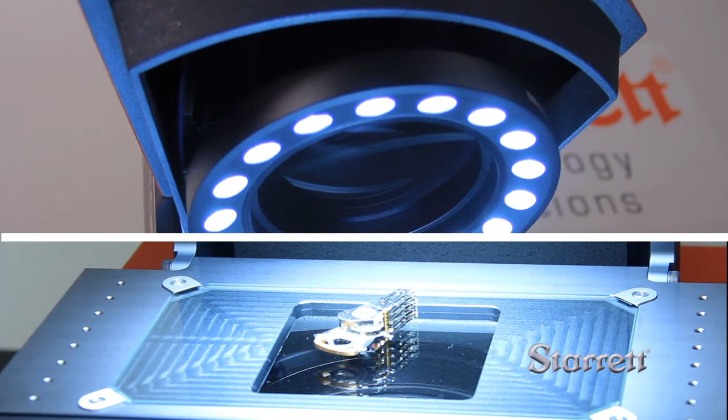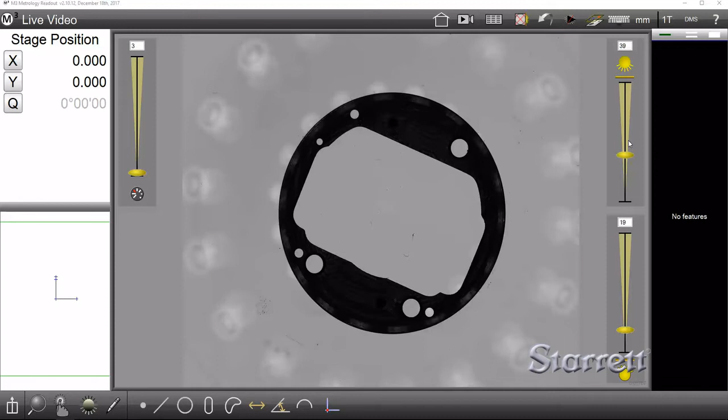Let's start by putting a part on the machine, adjusting the lights appropriately, and taking some simple measurements without a previous program. First, place your part in the center of the field of view, then adjust your light levels and focus to get the best measurements possible. You can use surface lighting to get features that won't be seen through transmitted lighting, but for simplicity's sake, we're going to just use transmitted lighting for this demonstration.

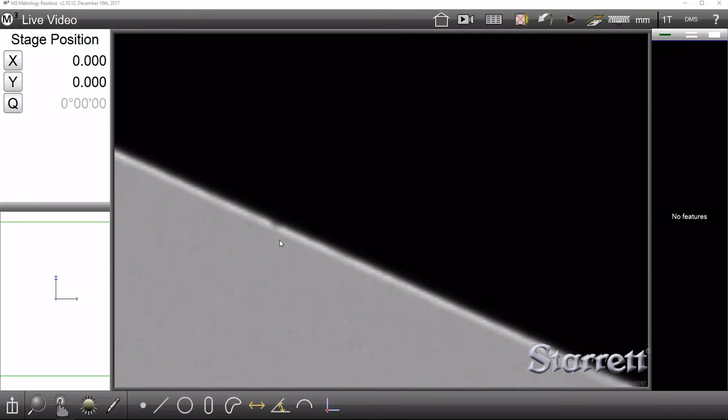One of the very important things is making sure you're in very good focus. You do this by zooming in on the part, looking at an edge, and moving your zoom in and out until you start to see the stair-step pattern here. As you can see, we started in pretty good focus. Now you can see it going out of focus. As you come back in, you'll start to see a pixel stair-step pattern appear, and that means you have optimal focus.

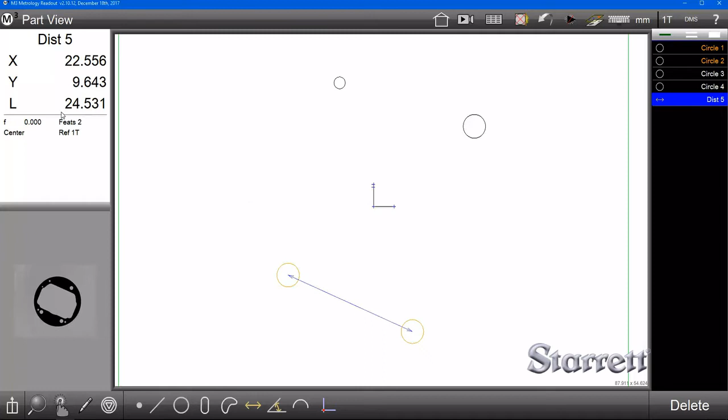At this point, feel free to start clicking on features to populate the feature list, and then you can measure those features in relation to one another. For instance, we could take the distance between these two circles here. It'll show you the distance to the centers, it'll also show you the closest distance, like that, and then also the furthest distance. You can do this with most features.

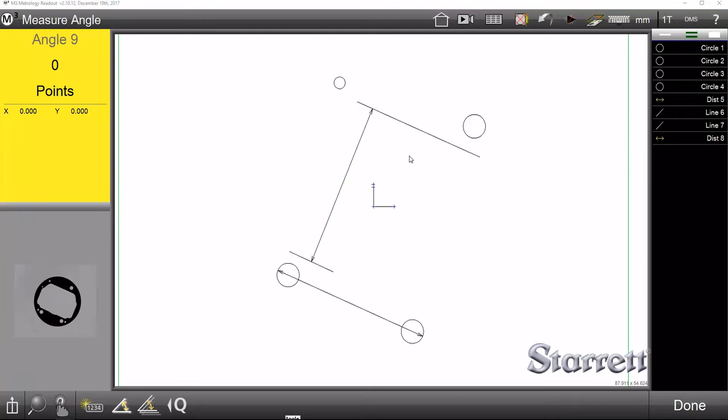For a line, just simply click on a line. You can then do things like measure the distance between those lines, or measure the angle between those lines, like so.

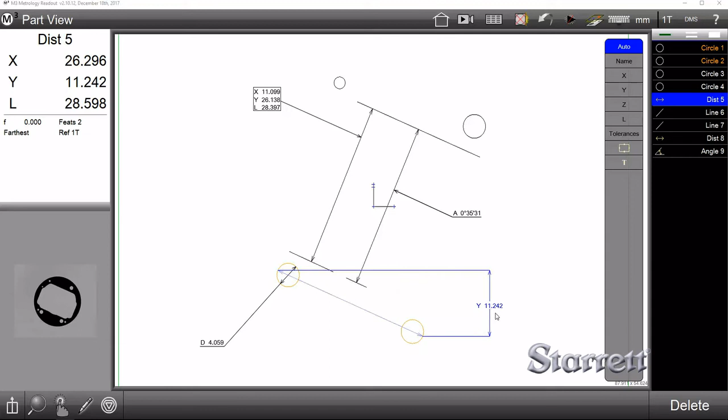We can then use markup to see more graphically these values. For instance, there's our angular measurement, here's diameter, here's a distance here. You can see it's toggling between X, length, and Y. You can also discretely change these up here on the upper right.

Next, I'd like to show you how to set up a simple parts program. Essentially, we'll be doing the same types of simple measurements we were just showing, although this will be part of a formal program that you can pull up and use at a later date.

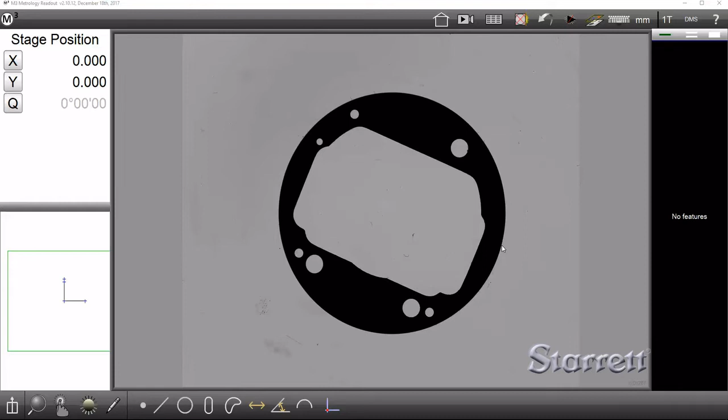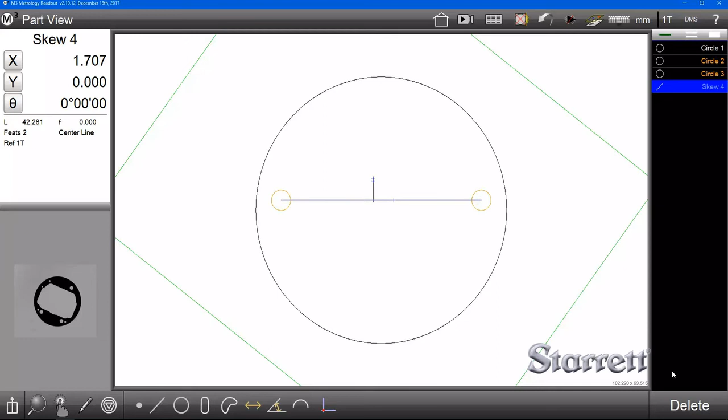The first thing we'll want to do is measure some datuming features. For instance, I'm going to measure the largest outside diameter and these two smaller circles here. What I'll then do is go into this graphical interface, and set our skew as these two smaller circles. What this does is it makes the line between them our horizontal axis.

We'll then set the zero point as the center of the very large circle here. This is all somewhat arbitrary, it doesn't have to be this way, it's just what I'm deciding to do right now. Now that we have that set up, we can start to measure other features on the part, like so, and this is all being recorded as part of the program.

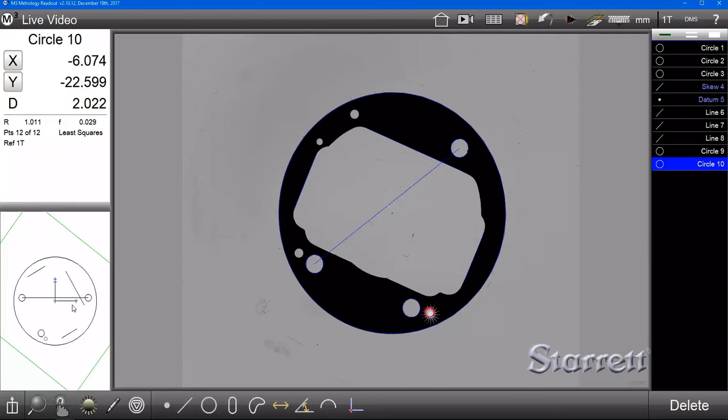You can see these features populating, and then we can start to do some measurements. So you can measure the distances between these circles here, you can measure the angles between these lines here, and we can mark them up for ease of reading, like so.

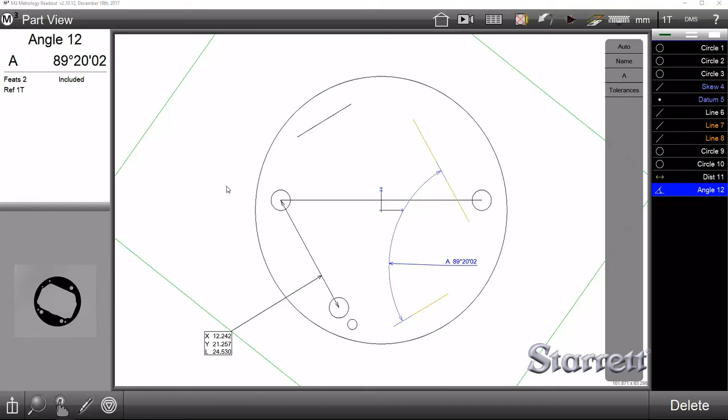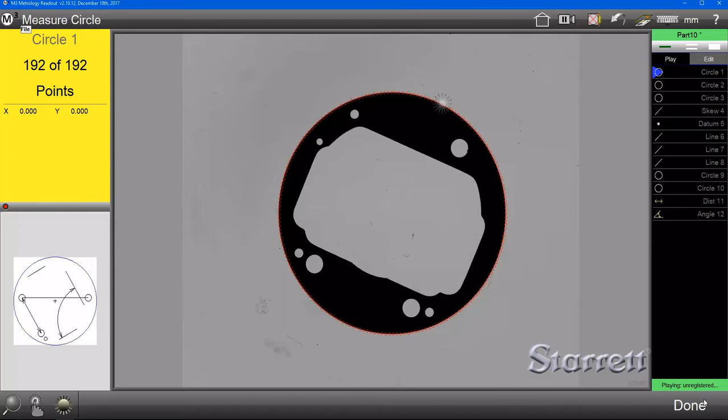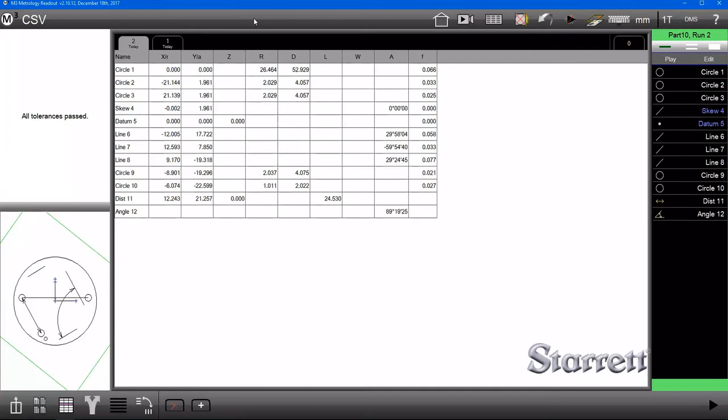Now, if we go up to the top left and hit play, it's going to prompt us for those same features we used in the first place. So we're going to remeasure that outside diameter here, then we're going to measure this circle. Then the rest of the program is going to play automatically and show us our results in this view. You can also see it in the graphical interface and on the video view.

Next, we'd like to show you how to take that same part program and set it up for auto part recognition. Instead of manually pulling up the program, you just place the part on the machine and it will recognize it and measure it automatically.

This is one of the best features of this machine, and it allows you to measure parts with very little interaction. So first off, we're going to start with a pattern.

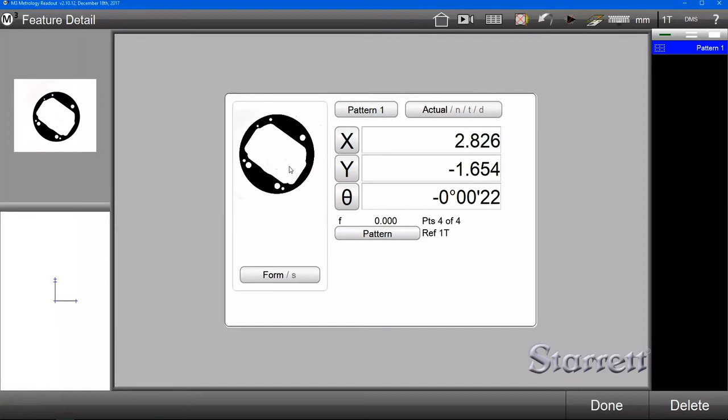Simply drag a marquee over the entire part, and you'll see it populate with yellow spots everywhere. Now you can see we've got a couple of stragglers here because of some specks on the stage glass, and that's very common, so you can come in here and remove those. We'll hit done.

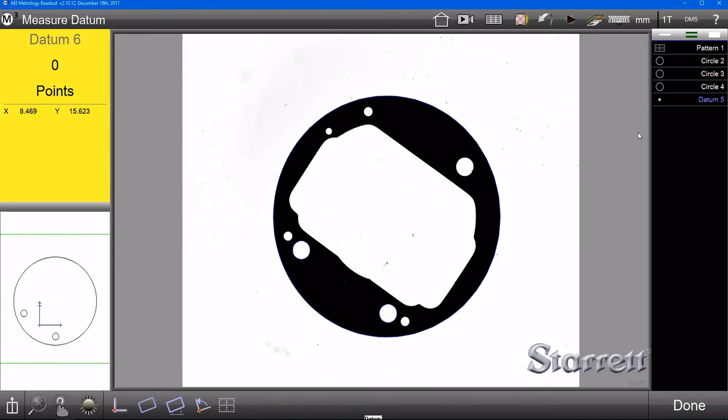Next, we're just going to set up our datuming features like we did previously. So we'll measure these two smaller circles here, then the large circle here. We'll set the skew as those two smaller circles, and we'll set our zero point as the large circle. Now we can measure the rest of our features, like so.

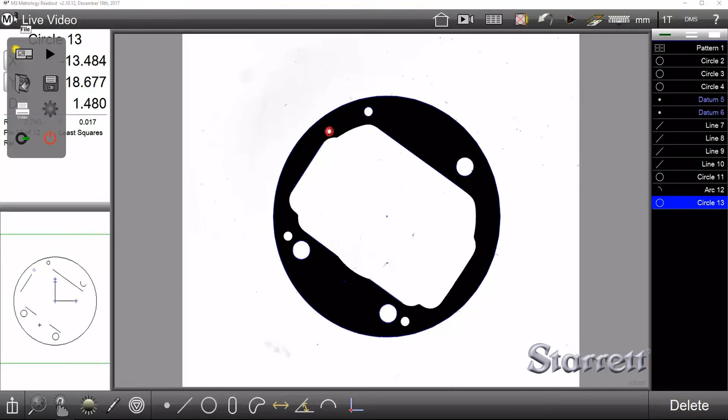Now when we hit play, it's going to use that pattern to automatically orient itself. We're going to say yes to saving changes, and then we're going to add that to our auto part recognition list in the settings. So you go to Programs, Program Finder, Add to List, part number 12.

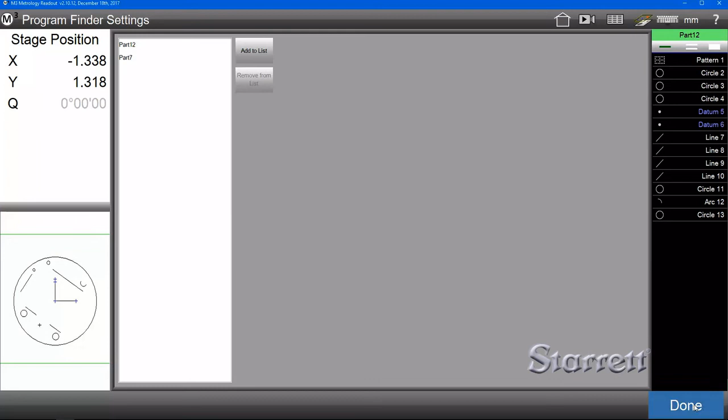Now, in order to activate the auto part recognition mode, on the top right you'll see a little play arrow. Click that and remove everything from the field of view. Now click New Part on the top left. You'll see the play arrow go green, and when you place a part in the field of view, it's going to automatically search a database for a matching pattern.

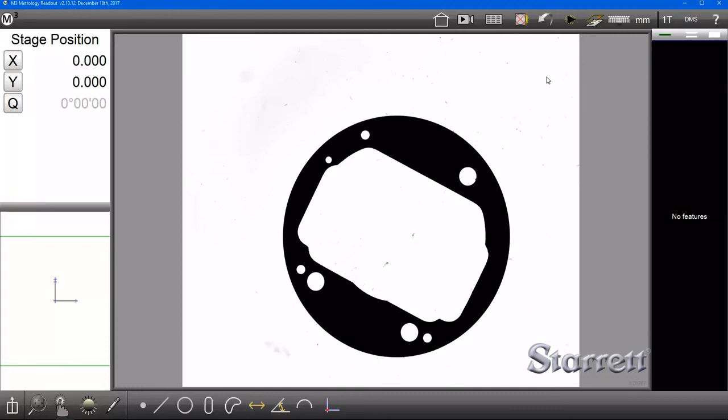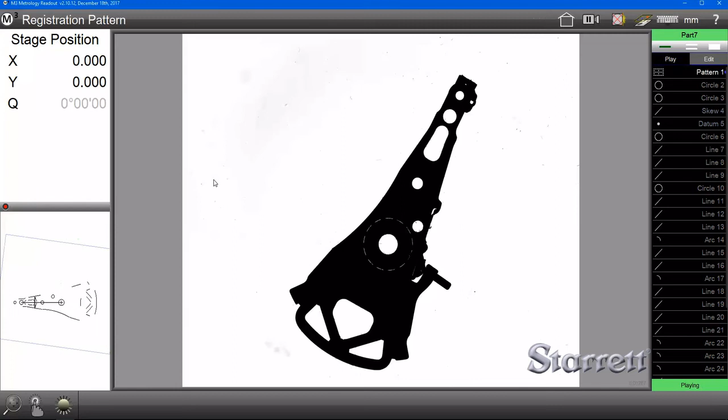It will run through the program automatically, and what's nice about this is when you take this part off and put a completely different part on that's also in the library, it will measure it just as quickly. And there you have it.

The M3 software allows you to use a variety of tolerance reports and a few different file types. Let me show you how to do that now.

Once your measurements have been made, there's a variety of different ways you can look at the data. Under the list here, you can see various different tolerance reports in different types, and these can all be exported to the location of your choice as a TXT, CSV, TSV, or even a DXF, which is a graphical drawing that can be seen in CAD.

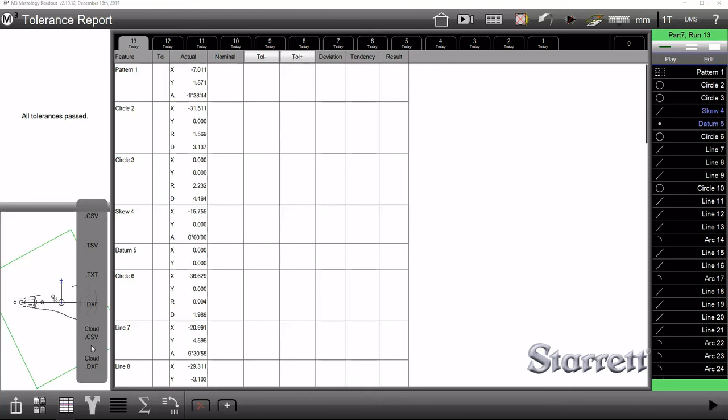There's also cloud export options here, and all of these are part of the automatic measurement routines in the software.

One of the best modules for this machine is the thread module. What this allows you to do is measure a variety of different types of threads very accurately and very quickly. Let me show you how to do that now.

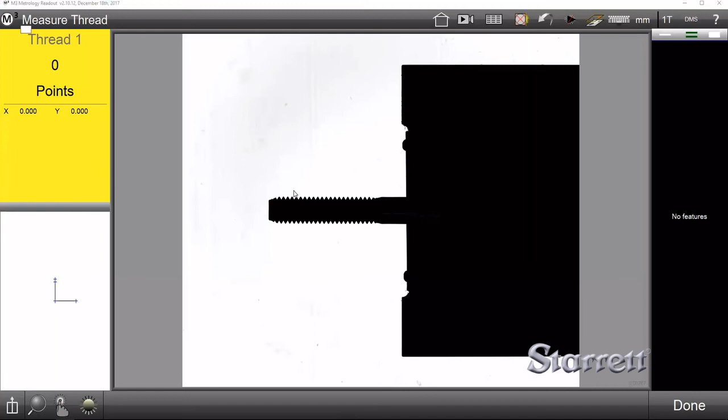Simply select the thread module, drag the marquee over the threads, hit enter, and then done. Now when you select that feature from the feature tree, you'll be able to look at the data, including outside diameter, root diameter, pitch diameter, and pitch.

You can then go set up tolerances based on normal hardware standards, or you can set custom tolerances yourself.

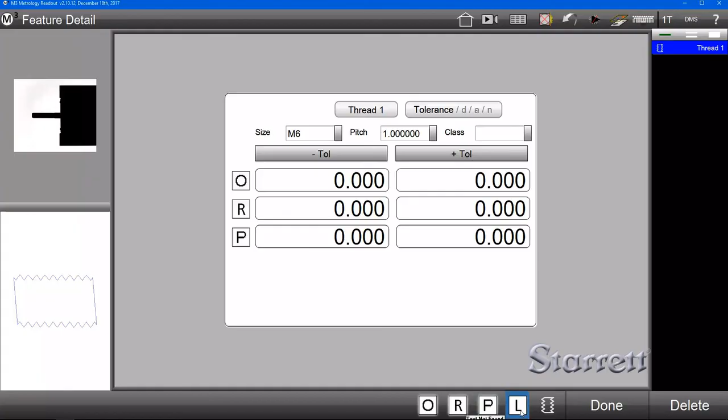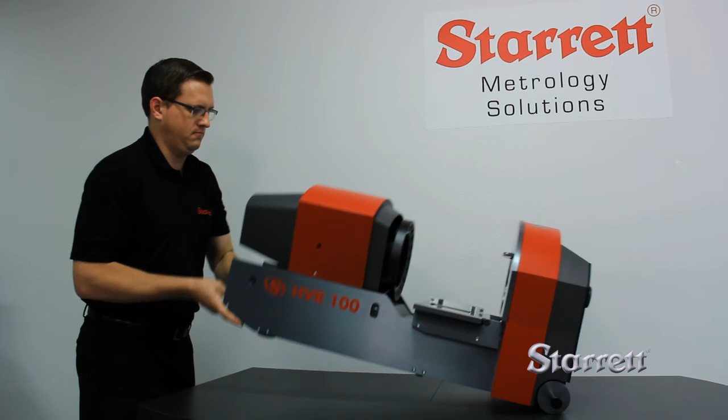The flagship feature of this machine is its ability to be in both the vertical and horizontal orientations. Let me show you how that works. Simply flip the stage 90 degrees, grab it by the upper handle, and then slowly lay it down on its back. Although easily accomplished by one person, we still recommend two people for safety's sake.

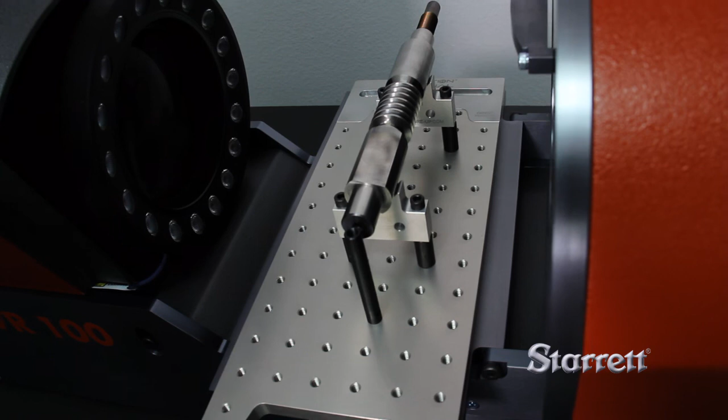We offer a wide array of fixturing options, one of which is our standard fixturing kit, which will allow you to place your parts on the stage in the horizontal configuration with extreme repeatability.